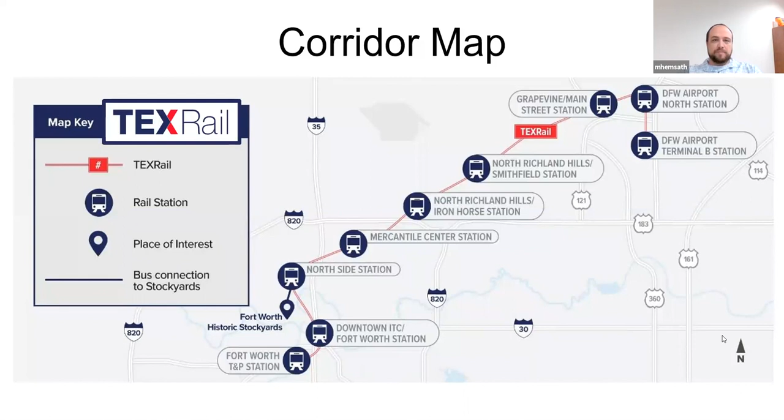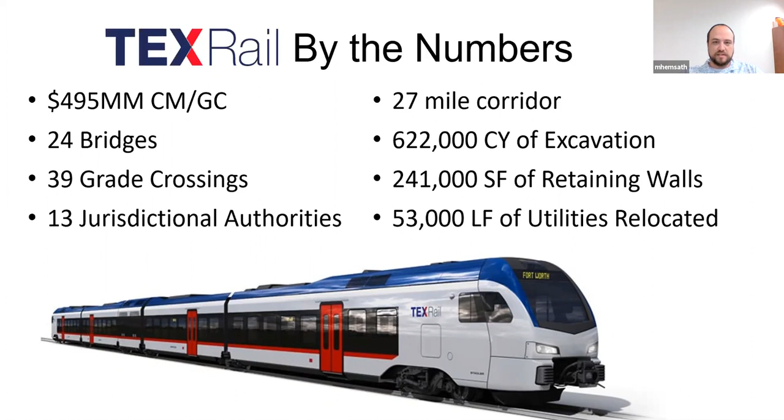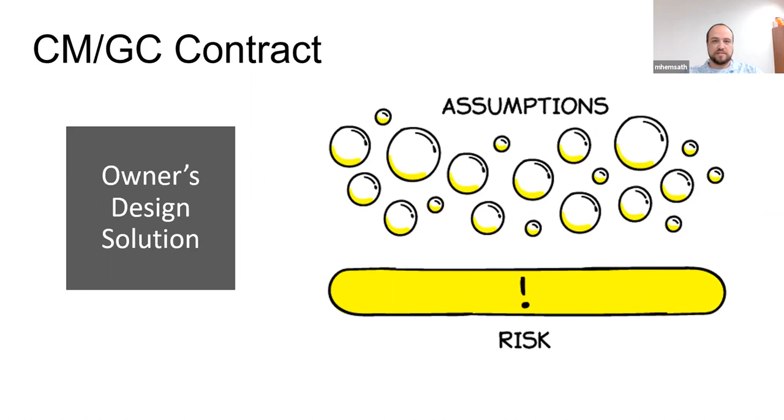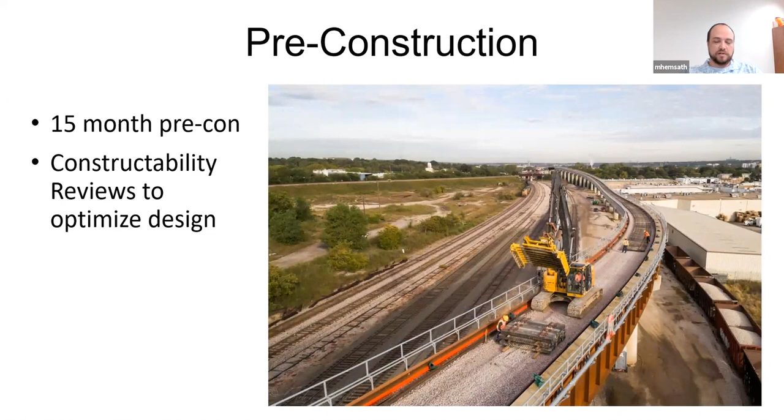So why CMGC? There's a lot of assumptions, especially in this job. As we get into the hole in the wall, you'll see all the assumptions that were made beforehand, and with assumptions come high risk. So bringing Archer Western Herzog onto the project early, TexRail was able to mitigate some of those design and construction risks. During pre-construction, we had a 15-month pre-construction period that helped us review and optimize the design, specifically hole in the wall, as well as a couple of these other bridges.

So as we got into planning the work, you've got to be concerned about what the other agencies and railroads are going to require. For hole in the wall, shoring was a major component as we were going under 4 active freight lines that go through Tower 55, one of the largest and most congested freight crossings in the country. Schedule-wise, this was 24 months from NTP to be able to build the work.

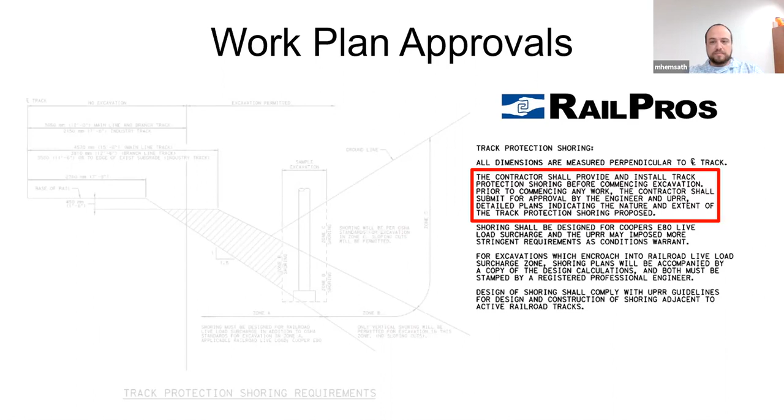So Doug, next slide.

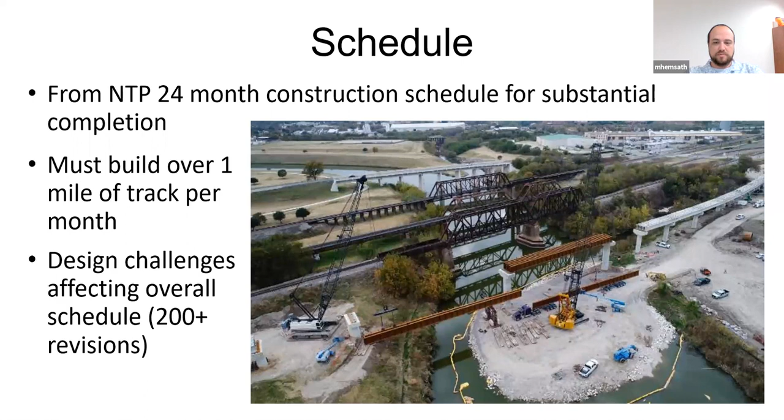So, schedule NTP for substantial completion meant we had to build over a mile of track per month to be completed. This picture shows one of the major river crossings we had to do, also included in that one mile per month, along with all the other design challenges on a CMGC job. We had over 200 contract and drawing revisions to the project, so a very complicated, very complex job that required a lot of coordination from the designer, the owner, and us, the constructor. To make that happen, we had to use multiple forms of accelerated construction.

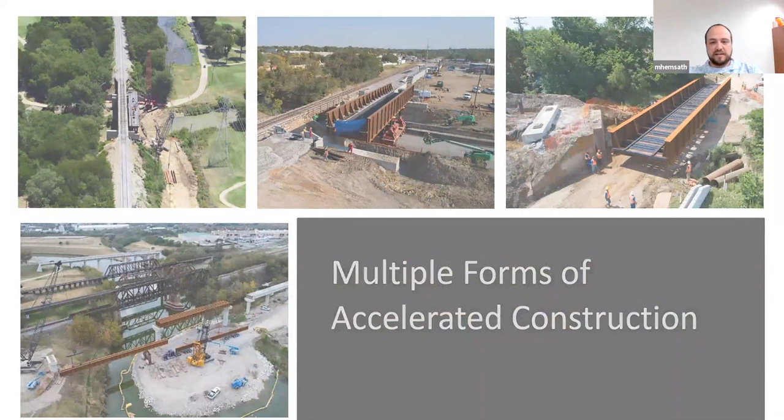Most of these had to do with bridges, but next we'll talk about at-grade track. There were 17 miles of track under existing freight that had to be completed while keeping the freight open. The freight allowed us 3 and 5 day outages every week to get those 17 miles done. In some of the more complex areas we got 400 feet done, and in some of our longer shutdowns we got up to about 2,000 feet, done in a 5-day outage where we removed and replaced the track in its entirety down to the subgrade and back up in 5 days.

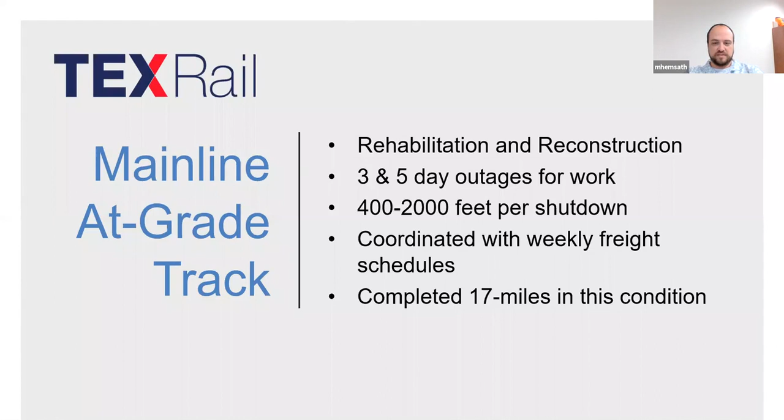Coordination is absolutely key when working with the Fort Worth Western Railroad in these outages. We had a very detailed schedule of what happened every day, overnight, and what scope was supposed to be done. That way we could adjust as needed, bringing crews in early, or if things were getting delayed, bring in additional resources to make sure we hit our closures.

Out of all the outages, there was one instance in the 2 years that we missed our outage. The reason is we got about 3 inches of rain right when we opened up the grade, and dirt and the grade didn't mix with the rain very well. So that one was a little tough, but overall the team did a great job and overcame those challenges.

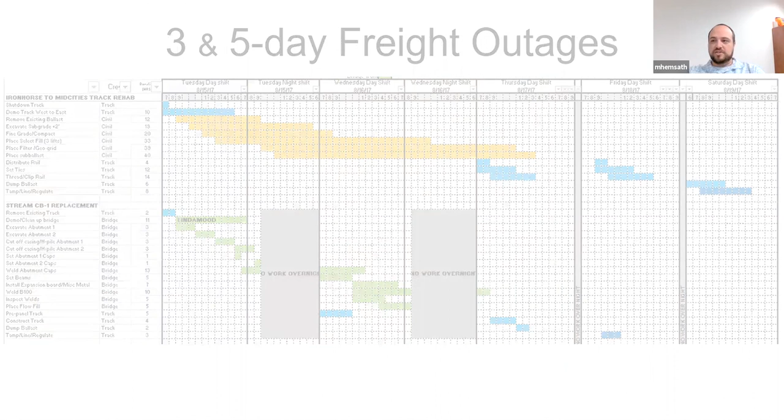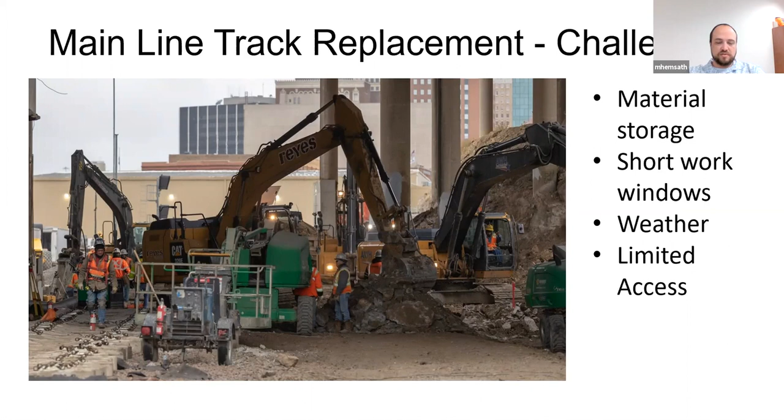The picture coming up next shows a portion of the hole in the wall. This is part of the track demo—very congested, a lot of work going on. Again, this was a three-day outage to get some of this track work done. So being able to get our materials where they needed to go, short work windows, limited access, and weather were all key challenges and key planning aspects to this project to make sure it went off without a hitch.

Next, the Ira E. Woods Bridge. This was a 90-foot through girder bridge. The Ira E. Woods is a historic bridge, and where it was situated on the job, there was no adjacent property to build the new bridge close by. So we actually had to build the new bridge approximately 2 miles away in a laydown yard, then drove the new bridge down Main Street in Grapevine to its new location. The picture here shows the bridge coming to its final resting place after we moved it 2 miles down the main road. This was done in a 5-day outage.

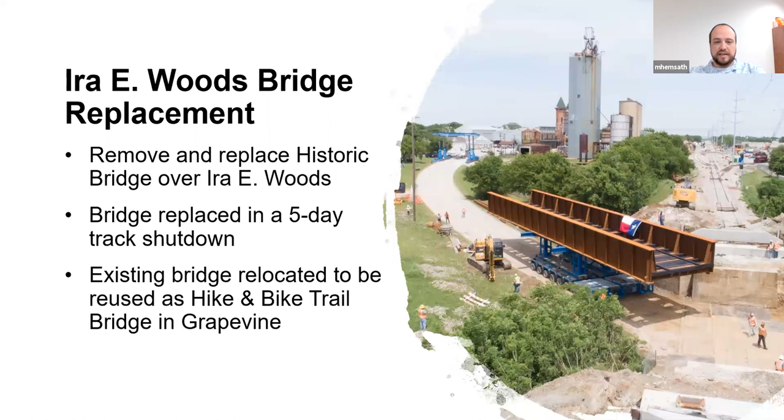To make it even more complicated, the old bridge we had to take and move about a mile down the road, and it's now used as a hike and bike bridge there in Grapevine. So a lot of bridges moving down the highway or down the roadways there—not every day you see bridges just moving through the city.

But to make that happen, when you're moving bridges of this size, underground utilities are a very major concern. So we worked with the city of Grapevine to make sure we didn't impact any of their water lines, because when they're only 4 feet deep and you're moving almost 1 million pounds down the road, that's a lot to be worried about. The existing bridge, like all old bridges, has environmental concerns with lead paint and asbestos, so we had to get that moved and abated. There were also major traffic interruptions, since this was the main roadway in and out of Grapevine, Texas.

Building the new bridge substructure had to be done in advance of tearing out the old bridge. In this picture on the left-hand side, those steel plates are actually covering the new abutment. We had to dig out to get to that new abutment to be able to set the new bridge, with very limited access. What you're seeing in that picture is exactly what our access was, and our entire right-of-way.

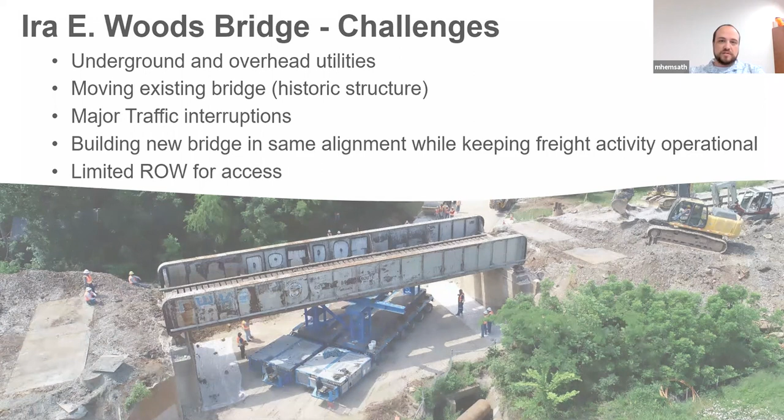This next bridge, Big Fossil Creek, goes over an existing golf course below. To be able to get here, there was absolutely no way to move it up and down the rail.

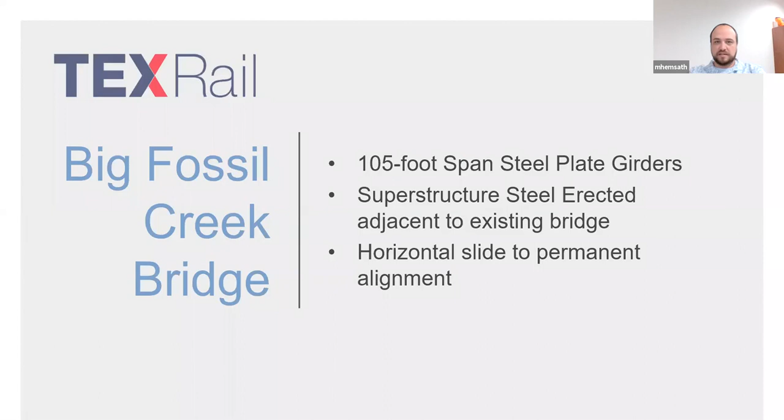So our team elected to do a horizontal slide into the permanent alignment. The bridge was already designed to accept the new bridge in its final location, but to build it, we extended the pier cap over so we could build directly adjacent to the structure we'd be setting it on, then used Hillman rollers and rods to move the bridge horizontally across the cap into the final location.

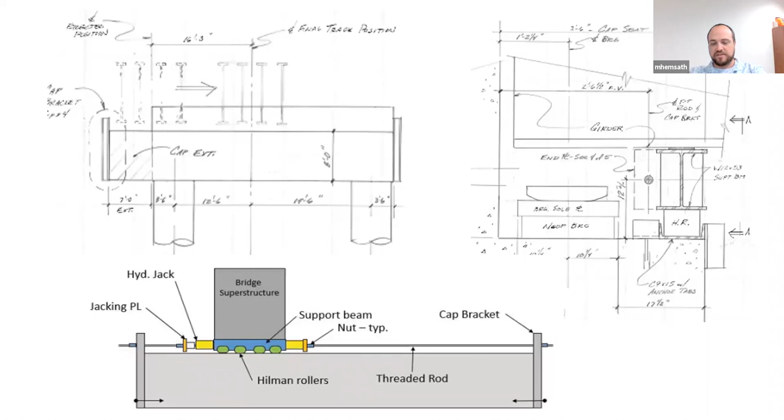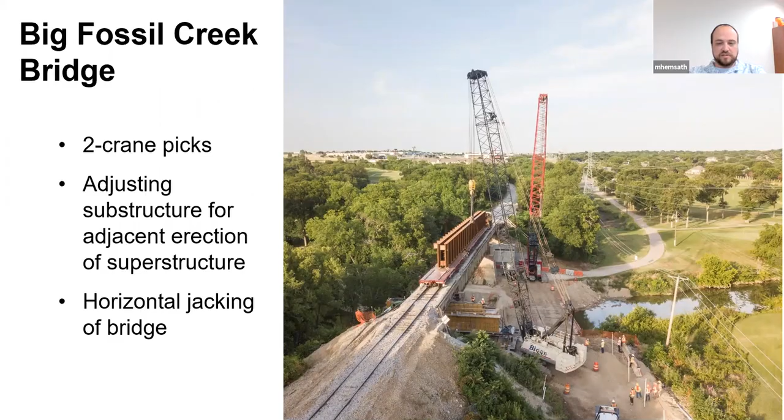Again, this was a 5-day outage. Next picture shows more of the tight access we had to deal with. On the right-hand side there are high transmission power lines, so we couldn't swing around getting into it. The only way to get those beams into place was to bring them by crane or by rail to the cranes, and then the cranes set them down onto the new cap. From there, we moved it over to the new location using Hilman rollers.

The challenge here was a public golf course, and being in Texas, they don't shut down very often - maybe a little more than they do in Phoenix, but still rarely. This was a 5-day rail outage, and what made it even more challenging is that the two outside spans, which were box beam sections, also had to be replaced in 5 days. Getting the old bridge torn down and a new bridge erected in 5 days was very difficult. Our original schedule was 9 weeks, and the team did very well.

It did rain on us a little bit here, but we ended up getting done in 4 days, so even 1 day in advance of our 5-day outage.

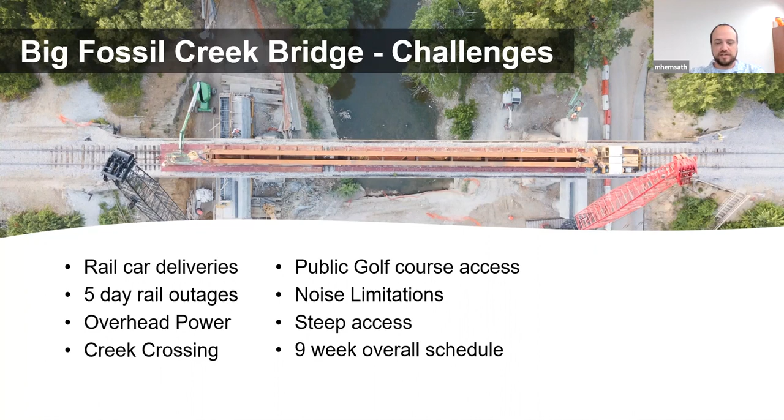Next bridge was 28th Street. Again, this is a bridge that required freight to be able to go over it a few days after we were done. So being able to build this one off to the side - this was also a 130-foot through girder span - we used SPMTs on this one as well.

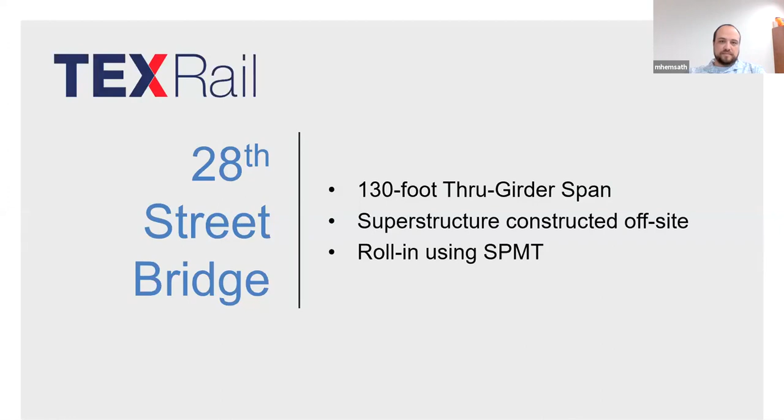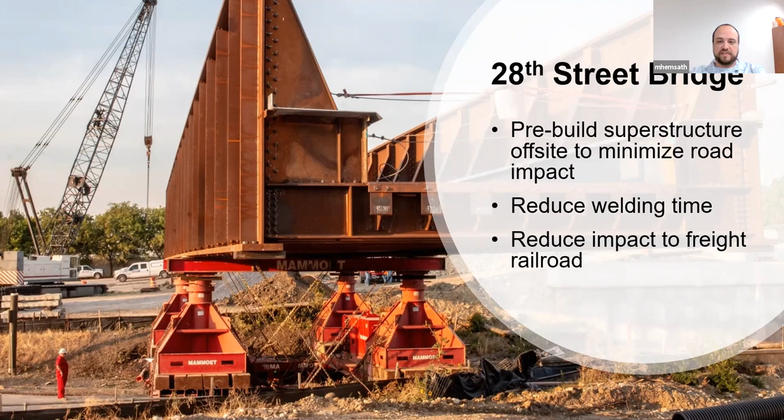This one was a much larger bridge than the Irie Woods bridge, but being able to get it off to the side, we were able to get all the welding done. 28th Street is a TxDOT owned roadway, and they would not allow us to close that road for any length of time. So to get this entire bridge welded the way it needed to be, we had to build it off to the side and then do our touch-up welds and final welds once it finally got in place.

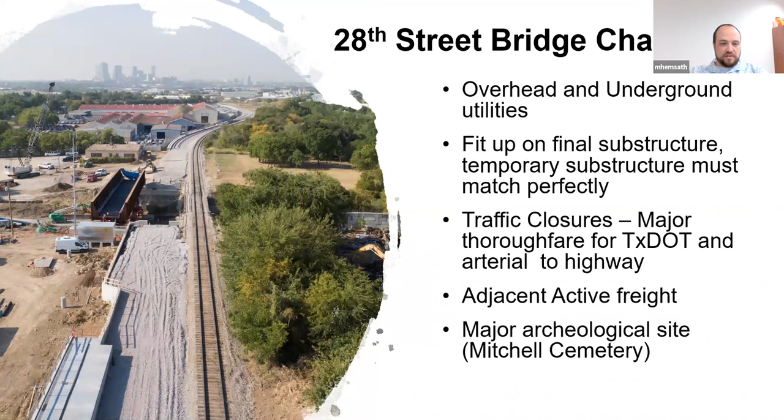This is also to reduce the impact to the Fort Worth Western and the Union Pacific. This is that area there - we built the bridge just off to the left-hand side by that white crane, came down onto the roadway, and moved that bridge into place. Again, this was a 5-day outage.

The other thing we had to worry about in this area, on the right-hand side of the picture, is an archaeological site - a cemetery, Mitchell Cemetery, that dates all the way back to pre-Civil War. So it was a very sensitive area in terms of archaeological sites. We had TxDOT and freight railroads involved, so a very congested area with a lot of jurisdictional authorities.

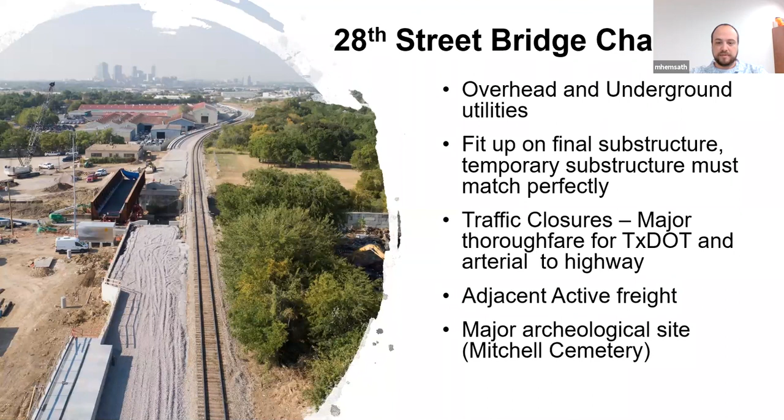With the overhead and underground utilities, moving that bridge, we actually had to raise up a couple of the overhead utilities to make the bridge fit in its final alignment. And with that, that's all the boring-moving stuff. Doug will take it over from here and go through the hole in the wall, which I believe is what everybody got on this call to actually learn about.

So I think you heard Pam say at the beginning, I'm kind of a passionate guy for bridges. I'm a bridge nerd, if you will. And this job was a bit of a dream for me to be able to be involved with, because this is a really unique thing that we did on this project.

The project was full of bridges, and what we're hoping you would take away from this presentation today is on these railroad projects. A lot of people in the audience deal with DOT projects, maybe more than rail, but a lot of times you have freight rail interaction on your project, and we were hoping you could see ways you could take a second look at the planning in advance of those projects, see how to get them done a little bit faster, a little bit safer. Safety and high quality is what it's all about when you're dealing in any construction setting. That's what we ultimately were after on this job.

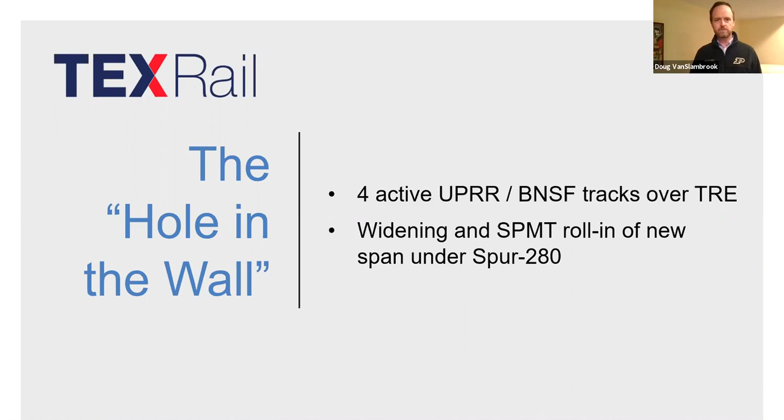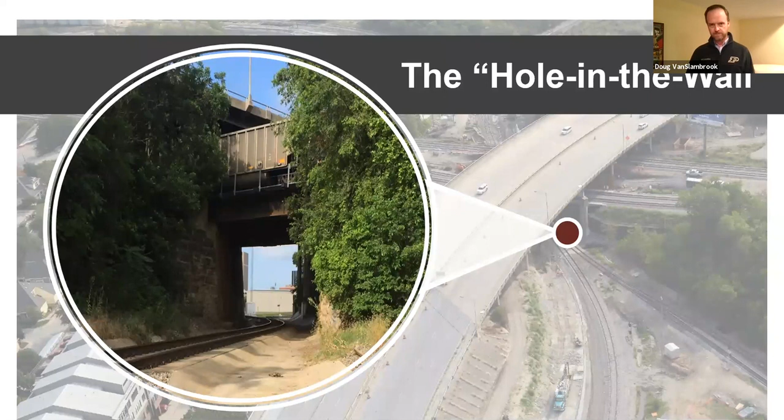So the hole in the wall, it was kind of a colloquialism, if you will, but that's what it's all about, is that picture right in the middle of the screen. You can see the little window that the Trinity Railway Express shoots through, as well as Amtrak and Union Pacific Railroad. There's a lot of crisscrossing of other infrastructure over the top of it. Essentially what we had to do in this portion of the project was get rid of the old span there in the middle of the sandwich and replace it with a brand new one. And we had to do that all under short outages and not disrupting freight service, passenger service, or TxDOT traffic. You can see in the background picture there's a major thoroughfare going into downtown Fort Worth, going over the top of this interchange.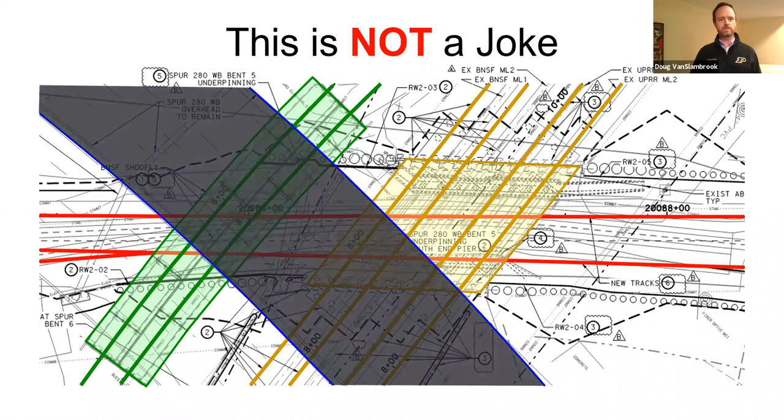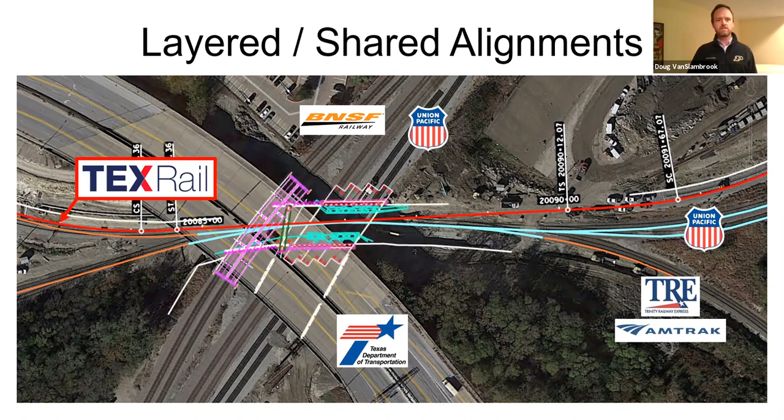So here are kind of all the players, I'll highlight them on the screen here as we go. You have Trinity Railway Express, Union Pacific, Amtrak, BNSF Railway. So you can see it's a very crowded party, and we're all trying to function together. And then you've got TxDOT over the top of everybody. So there's the KMZ line work of essentially what we were building underneath everything.

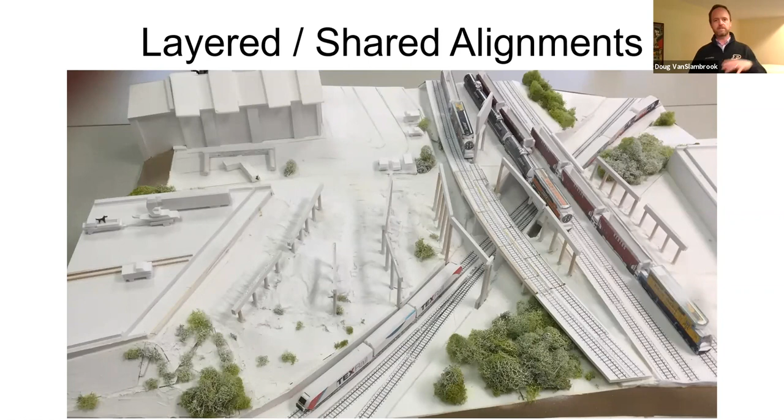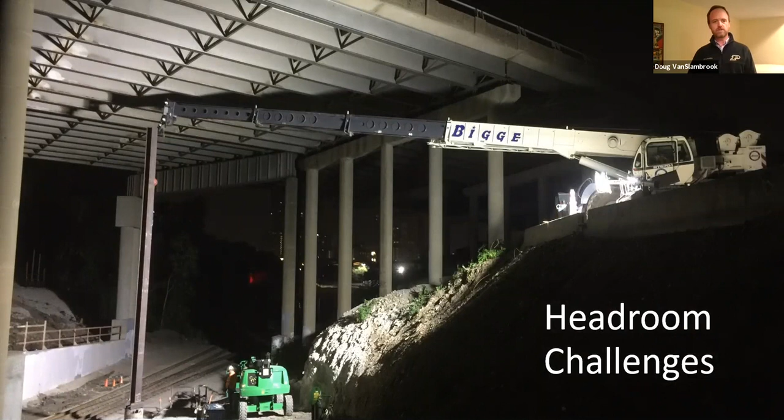This is the Trinity Railway Express track, which would become the double track TexRail commuter track, sitting up on top at the same grade. The crane you see in the picture is at the same grade that all the freight railroads were, passing underneath the TxDOT overhead. So you can see it's just stack upon stack upon stack of things to work within. That's the type of headroom challenge we dealt with all the time, drilling shafts, installing formwork, and placing concrete pumps.

So Matt talked about constructability reviews and CMGC. After the constructability reviews, we went through this with the owner's design. The owner's design had a really complicated detail of underpinning an existing TxDOT support and offsetting some columns, and it was going to be kind of a big mess to build.

So we brought in a third-party construction engineer and a lifting consultant, a heavy moving consultant. We had Mammoet on this project. We had another company called Burkhalter, which is now branching off and doing a different company - they're not Burkhalter anymore. But in any case, we used heavy lifting equipment, SPMTs, push-up systems, and I'll show you all the details on these things.

Essentially we had to replace a bent cap on the existing TxDOT overpass in a very short one-time railroad outage. Then we had to pre-assemble our steel bridges off to the side - the new freight rail bridges for UP and BN - and bring those in under 2 separate short outages. It was phased construction, so you could keep all the freight moving while building all of this.

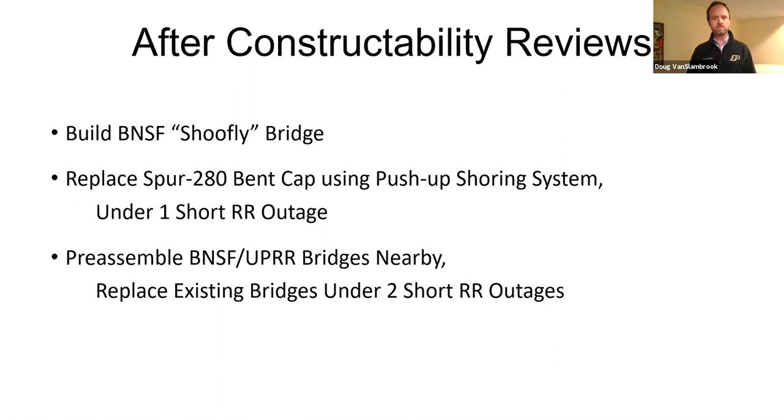So very tightly packed spaces. A lot of times we're building in between UP on one side of us and BN on the other side of us. So it's very busy and a lot of planning as a result.

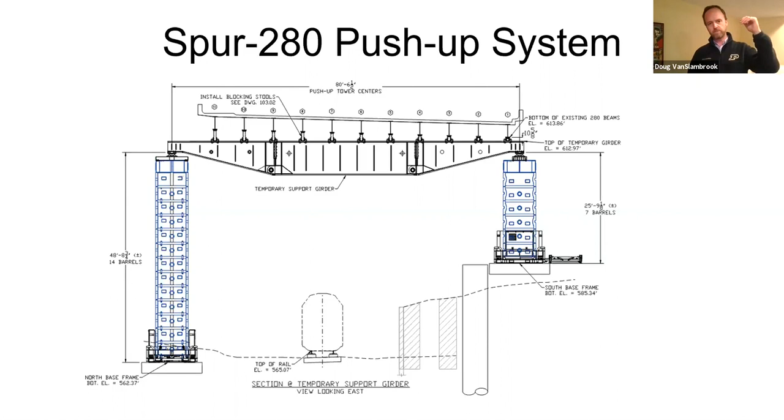So you'll see some views of the existing pier. What we were doing was lifting the 280 overpass off of its existing bearings so we could get the old pier out, put a new bent cap in place on a straddle, and then drop the deck back down on top.

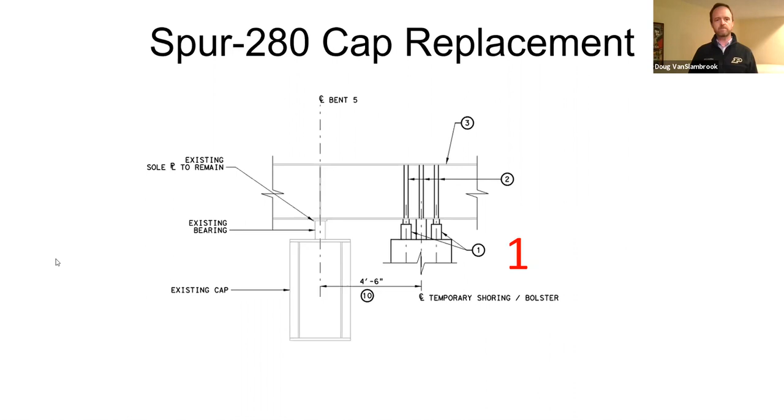So just the step-by-step of how this worked. Schematically here, you see the existing pier cap going across a narrower straddle bent. This is a schematic of that blue thing you saw in the previous view, which is our temporary cap that had a jacking system on it to lift the existing bridge off.

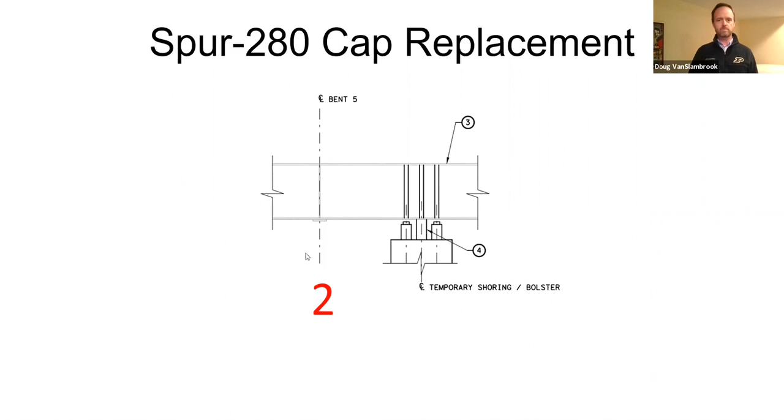Once it was lifted off, you could demolish the old structure while keeping it supported on the temporary bolster. Step 3 was to fish this new, larger section, longer straddle cap underneath the existing TxDOT bridge. Then you transfer the load over to the new bearing and take all your temporary shoring down.

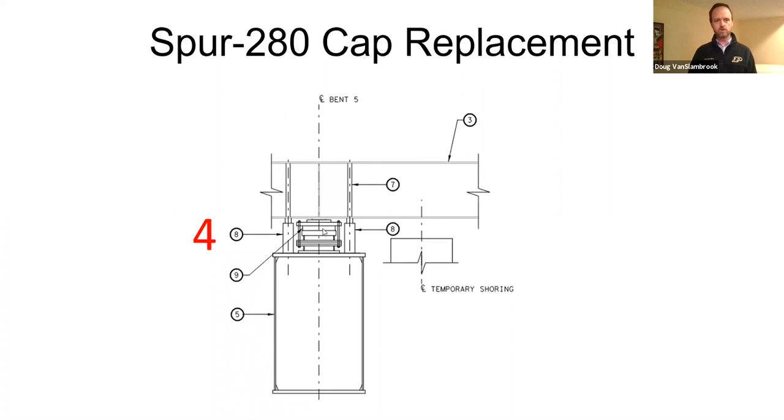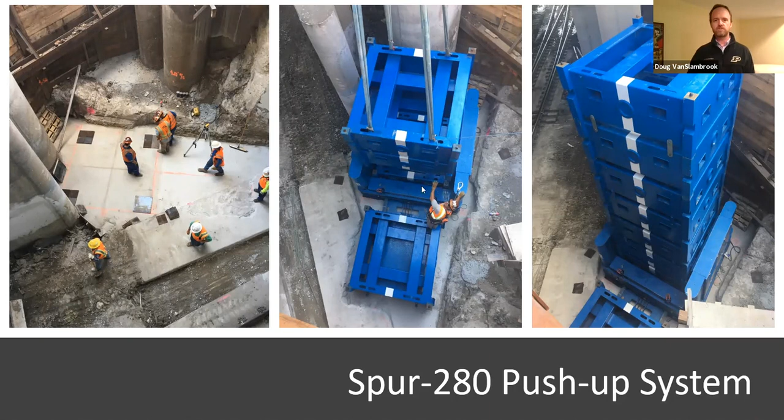So you see the stacks going on. Basically you stack this shoring system up until you get it close enough to the bottom of the existing deck, and you put this jacking cap on. This jacking cap is designed for multiple uses - you can see there are pin connections here, so they could swap out this center section to make it narrower or longer, whatever they needed.

So once you get it to the bottom of the deck, you put these bolsters on, and then you incrementally jack the 280 deck off slowly to get them off the existing bearings.

This is a big spot where our third-party construction engineer came in. We hired McElhaney, if anybody's familiar with them. What McElhaney was able to do was model the stiffness of the existing composite deck and figure out, when the deflection started coming out of this blue jacking beam, they fine-tuned the shim detailing on top of our jacking stools, so we wouldn't have to go over here filling shims an inch and then chasing it from location to location. It worked out really well. McElhaney did a great job, and we spent a minimal amount of time up here on top of the tower putting shims in place, which was kind of the goal of the whole thing.

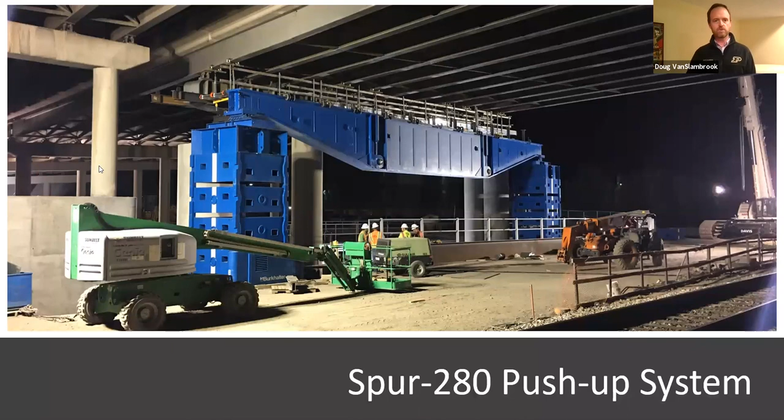We had some custom rigging devices fabricated, load tested, designed, signed and sealed. And then we had a couple of cranes sitting off on the outside of this to lift this off of its existing columns. This is after the temporary shoring system had taken the load of the deck above and daylighted it off of the bearings.

So you remove the cap, and then we did a wire saw cut of these existing columns to get them out of the way, just enough to be able to put the new bent cap on top.

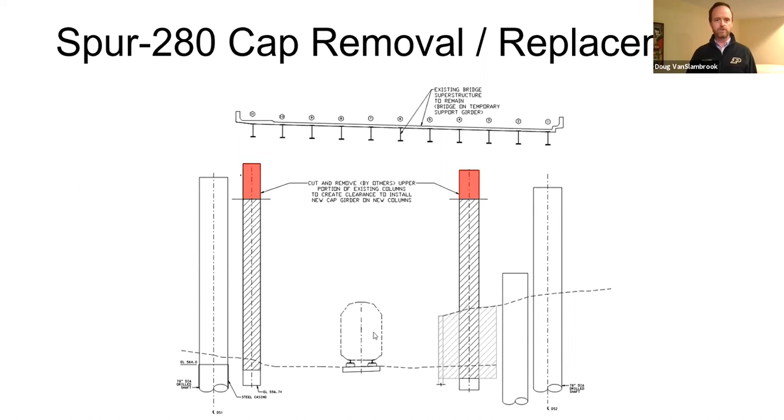So what you see here in the dark line work on the outsides is the new straddle cap columns to allow a bigger span underneath. You can see the shaded area coming down is narrower than the new one. You've got a single train down below, and when we're all done, we're going to have two.

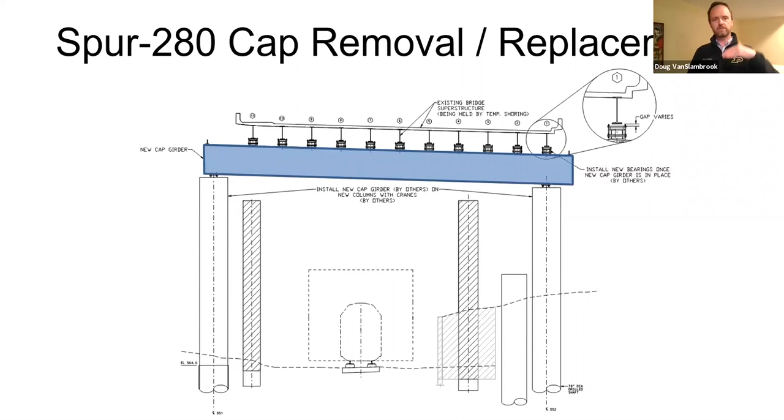So the blue shaded box is our new cap girder that was stuffed underneath. I've got a little bit more to show you on how that was done. But if you can imagine, this blue cap was placed on top of the new straddle columns, and then the load was taken out of the shoring system and down onto the permanent bearings.

Really tight working quarters again. This time, headroom got the best of us. We had to come up with a way to go up and over the top. So we had a 600-ton crane out here, a big hydro, reaching up and over the highway.

This was a nighttime outage of the highway, dropping the block through a 4-foot gap, essentially, to be able to maneuver one side of this new pier cap.

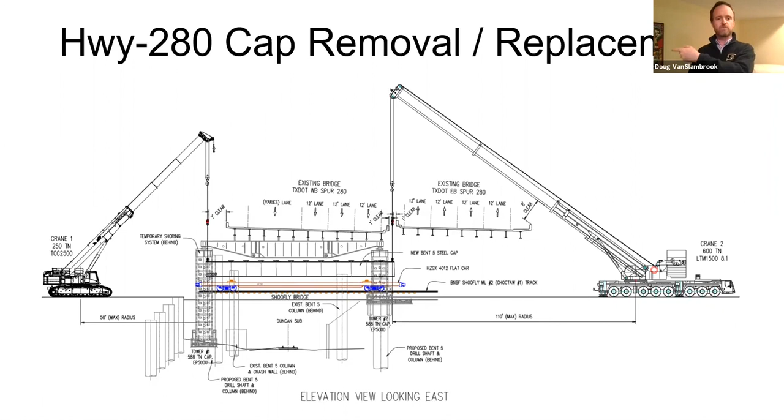You can see a rail car here in the foreground. So we utilized our shoofly bridge, our temporary BNSF bridge, and worked with the railroad to keep them off of the one track we needed, and brought the new cap in on a rail car. First, we took the old cap off, landed it on a rail car, took it down the way where the new one was sitting, flipped them out, brought the new one in, and lifted it up and on.

So it was a really efficient operation and highly coordinated with railroads to get everybody rowing in the same direction, as we like to say.

So here's our wire saw operation, cutting out the existing columns. And then, probably my favorite thing of this whole job - I've been around the block a little bit and seen a lot of tools and tricks of the trade.

But this is a counterweight offset picking device. In the steel erection world, we call these a pump handle, because if you can imagine yourself pushing down on that back end, it's like you're operating a pump handle.

So this counterweight would trolley back and forth through a remote control held by an individual on the ground. And as your crane comes up on the piece of column that you cut out, you keep moving this trolley back and forth until you get it perfectly balanced, and then it picks it right off and you can swing it out.

So you can reach up and under something. It was a perfect application for all the headroom issues that we had.

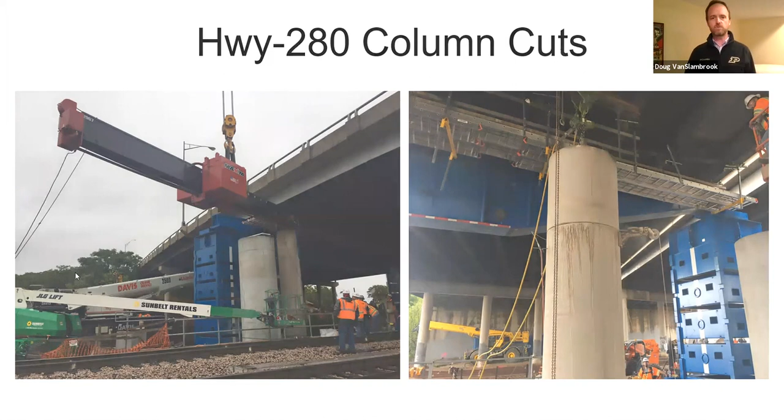And then the success of this operation - we had a 5-week outage that was talked about in the owner's original concept, where we said, if you let us do it our way, we can make this design a lot cleaner and bring it in an operation that's much more efficient. So we ended up, after negotiations of our redesign, at a 43-hour allowable outage, and we finished it more than 20 hours early.

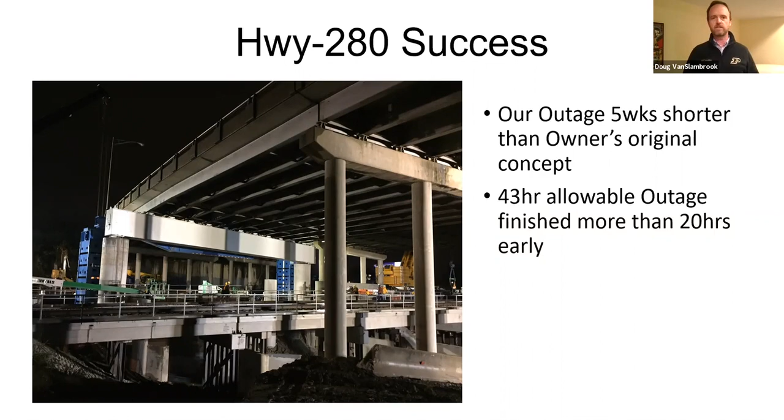We felt pretty good about ourselves. And then we got a dose of reality, because this next one was pretty tough, but it went off really well too. I'll share some of the challenges of this.

So after the pier cap - actually it's order-wise, we did the bridge first, the pier cap second, and then the second phase of the bridge. But this is a better order to show it in, so you're just going to have to roll with it.

So for the steel spans, we rolled them in, as you saw on that previous slide. You can see in this photo, we have the new bridge on an SPMT coming in on a temporary runway, which is bridging the hole in the wall, as we call it. There's a temporary gantry system underneath that jacks up and lifts the bridge off of its temporary platform. And then we pull this runway out and drop it down into the hole.

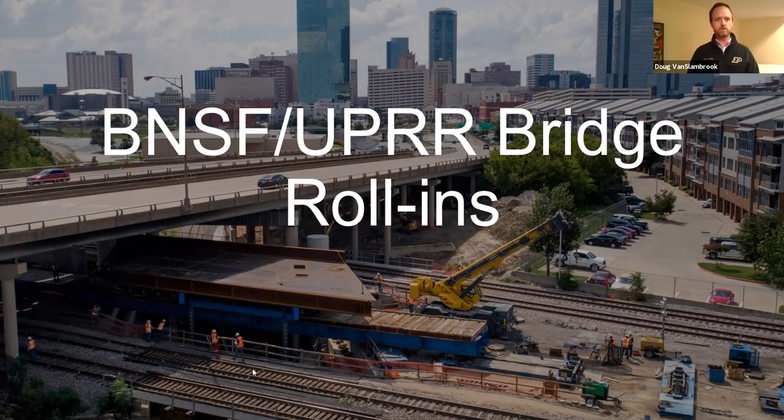So the roll-ins are kind of similar to what Matt talked about earlier in the presentation, with the close coordination between us and railroads and other stakeholders. We had this on an hour-by-hour schedule, all the way from the beginning to the end of the outage. We had checkpoints.

These green things are basically quality hold points, because there's certain points of no return, if you will. Anytime you do a complicated operation like this, it's paramount to say, okay, we can't screw this up, and we can't screw this up, and we can't screw this up. And those are the hold points, right?

So we identified all the hold points in this case and walked the railroad through an hour-by-hour meeting. We said, okay, hour 1 we're going to do this, hour 2 we're going to do this. And then there were check-ins throughout the night on a text message string, basically to say, you know, we should be at hour 11 and we're at hour 12. So we're trending an hour ahead.

Actually, at one point we were trending like 18 hours ahead, but we told everybody we were on time, so we didn't get everybody too excited and then have a hiccup happen and it all blow up in our face. So here's how we were able to get this accomplished.

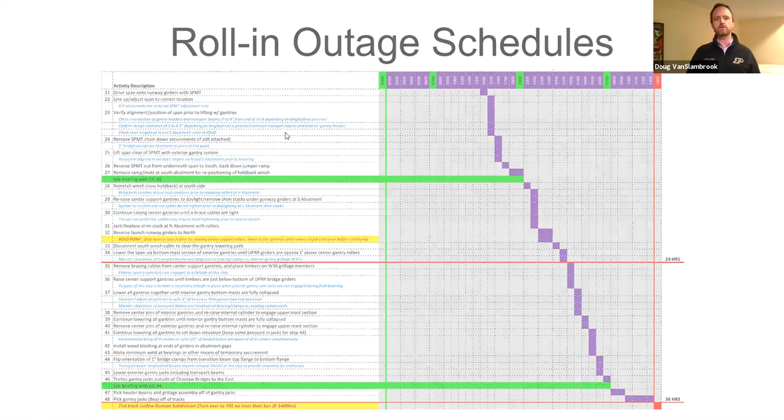So I mentioned we had a temporary runway. If you can imagine, you're looking through the hole in the wall, basically, where you see this gantry system. We had a gap here between new abutments that was much larger than the gap between the old. You had TxDOT running over the top of us, of course, and you had active freight on either side of us running back and forth constantly.

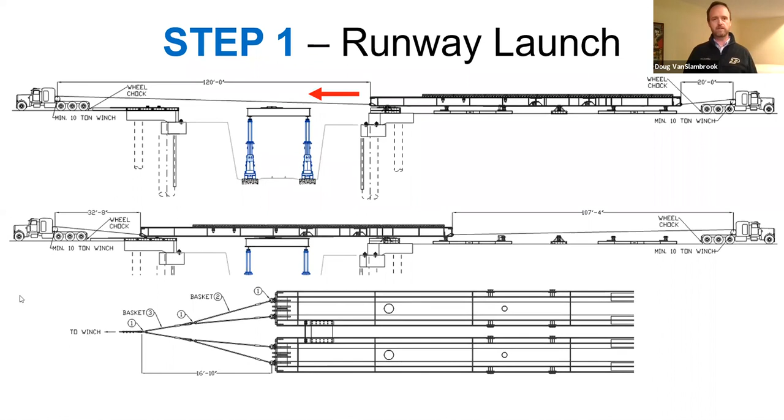So step one of this operation was to launch this temporary runway across the gap. We used basically a winch system - this is just a big heavy-duty tow truck - and pulled this runway in. You can see it supported on temporary supports on the right-hand side of the screen there, on rollers, and basically it just rolled across the hole until we landed it on the opposite abutment, creating a temporary bridge for the new span to ride up on.

A challenge of this is how this gantry system was detailed. You can kind of see from the center of the screen here, we had an interior gantry system that was used to support this runway temporarily as it came across the hole. Negative moment got a little too high when the thing deflected down over a certain distance off of this last support at the abutment, so we had to temporarily support it with another roller in the middle. So that's the highlighted gantries you see there.

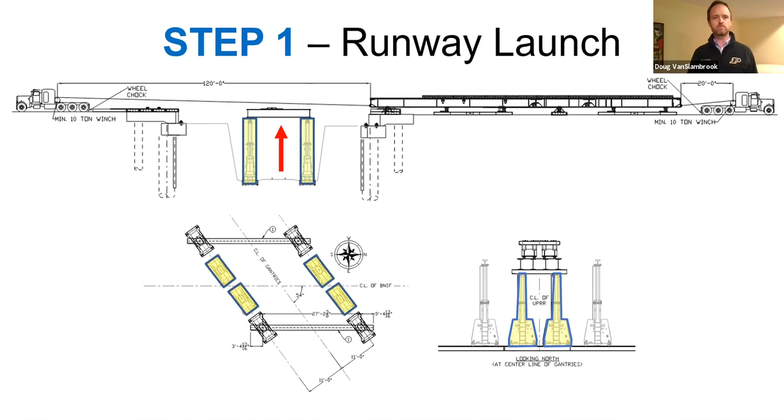And then once the system went over that temporary support, we'd jack it a little bit higher to allow a little bit more deflection until it landed on the other side.

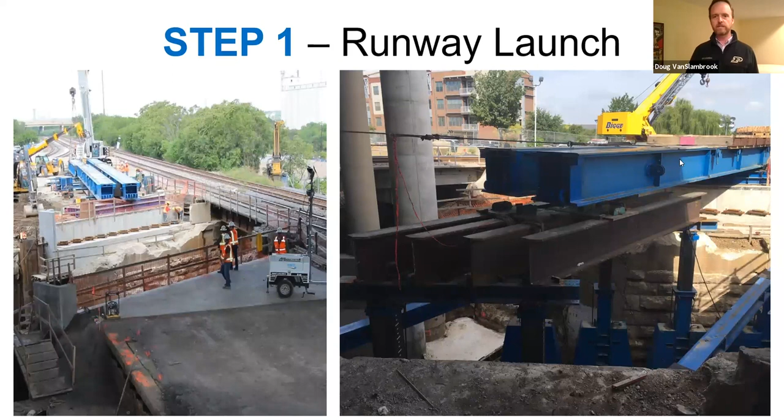Some pictures of that. Here's the hole in the wall. Basically, we're bridging the gap of the hole in the wall with the temporary runway. This is the temporary runway being launched across the hole, and the gantry grillage there with the rollers on top to accept it, to keep it from getting too deflected for its own good.

And then our pre-assembled span was about an 800 kip load. We put that on a self-propelled modular transporter, SPMT, as we refer to it in the industry.

And then we rolled that up a temporary ramp over the hole, basically into its final horizontal position over the supports. The exterior gantries, shaded in yellow, of the 8 gantry system would lift up on lifting beams, kind of tough to see, but just above the SPMT wheels. There are 2 beams there that this gantry system would push up on. So now you can see the span levitating above the SPMT.

It's not really doing that because the gantry's holding it, I just didn't draw it that way, sorry. And then the SPMT backs its way out, and then we reverse launch the temporary runway out the other way. Basically what it does is it leaves an empty hole for us to drop the bridge down into.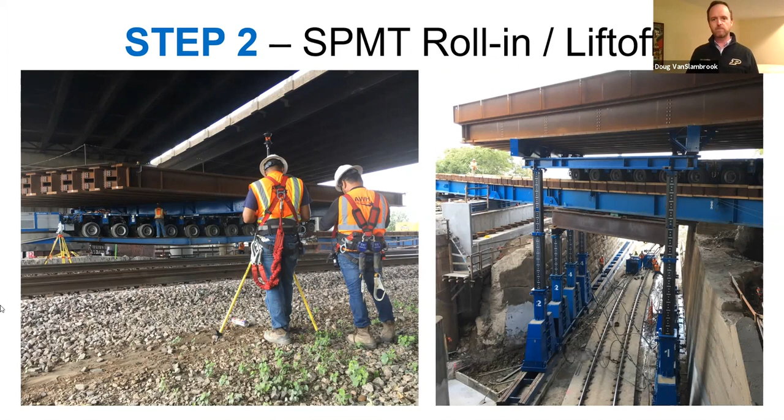And then on the right-hand side, that's the gantry system fully supporting the span completely off of the SPMTs. You can't really see it in the picture, but the SPMT is starting to back out. It's backed out about halfway at that point from where we had it when we brought the span in.

So some of the challenges we dealt with here: we had to be careful not to max out the height of the gantry system. It had a 20-foot total stroke, and I think we were something like 8 inches from having it fully extended to as high as it would go.

So the detailing of the temporary support members had to be just right. If we ended up making things a little too tall and having to push it too high to get clearance above the SPMT, we'd run out of gantry stroke. So that's just some of the things when you do a detailed operation - you think step by step, it's got to be perfect.

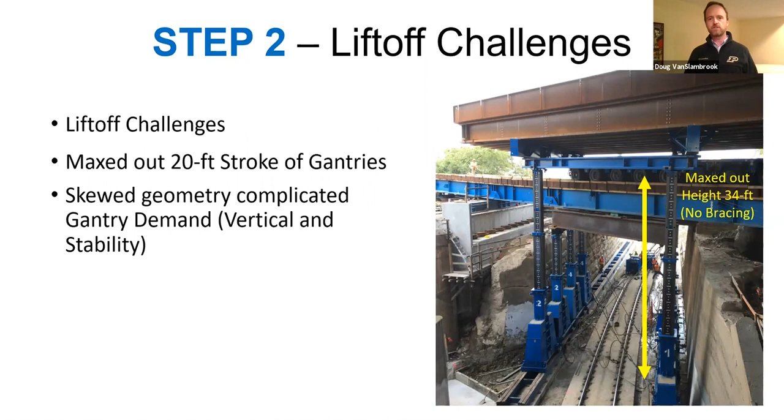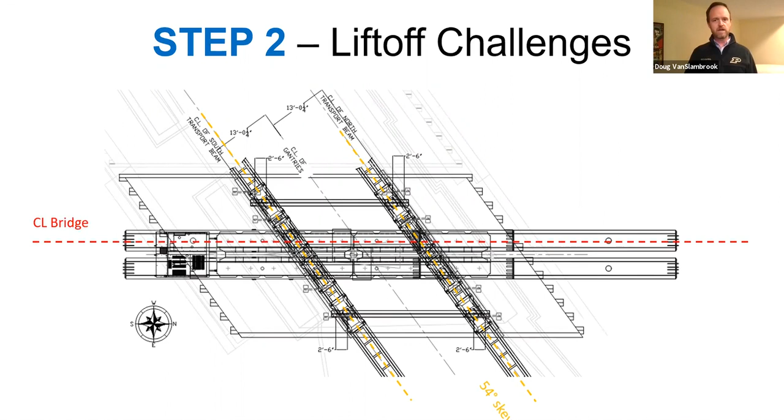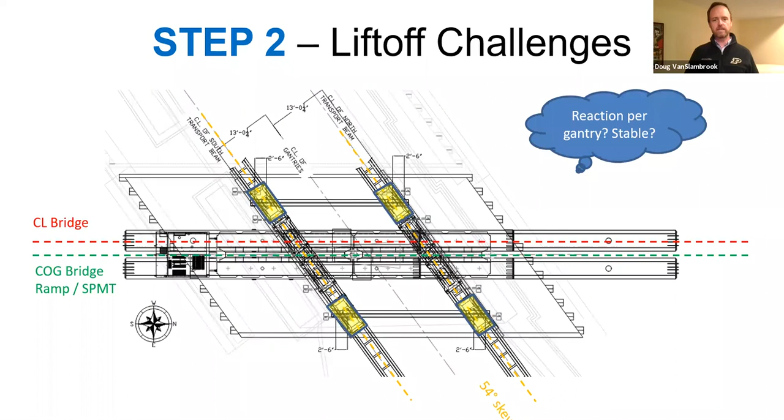The skewed geometry of the bridge made it really difficult to design the gantry system for stability. If you look at the screen here, you start to see some of the geometry challenges. We have a center line of bridge that was different than the center of gravity of the SPMT system and the ramp. That had to be accounted for in the stability of the gantries - are the reactions going to result in something stable?

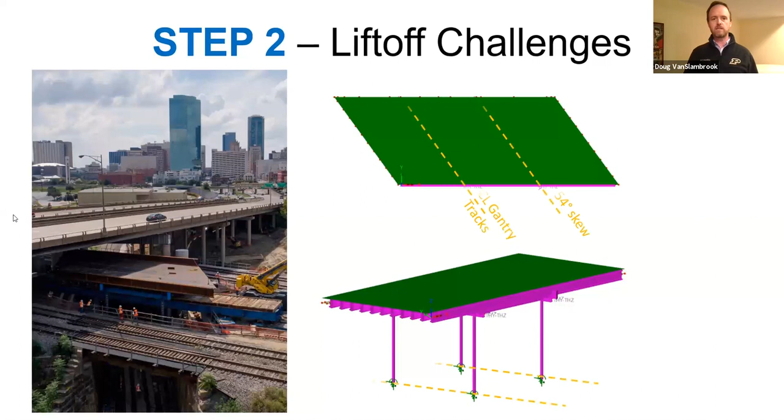It was also a big concern that the thing wouldn't be able to lower at exactly the same rate. But all 4 gantries were operated separately, so we were able to control that as we came down, and keep an equal load in each of the 4. That was really key to the operation - having a really good gantry operator.

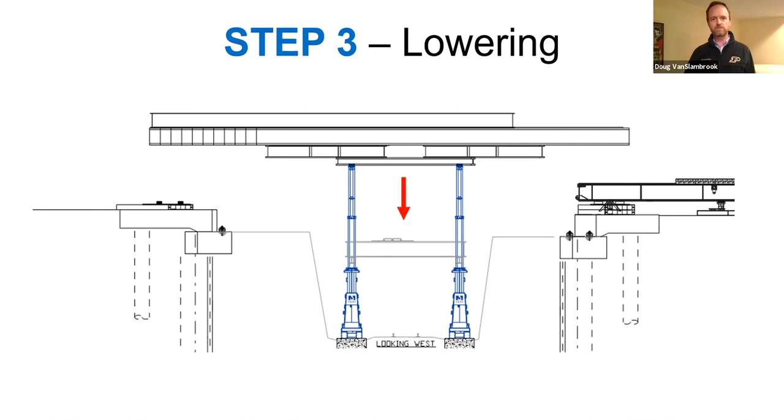And then step 3, lowering. Pretty simple on the surface - mainly what we were dealing with here was clearances. So I've highlighted our lifting grillage, and you can kind of see the existing abutment on the right-hand side. The old hole is much narrower than the new, but that had to stay in place to support the existing bridge that was still in the background, carrying UP trains back and forth while we were doing this work.

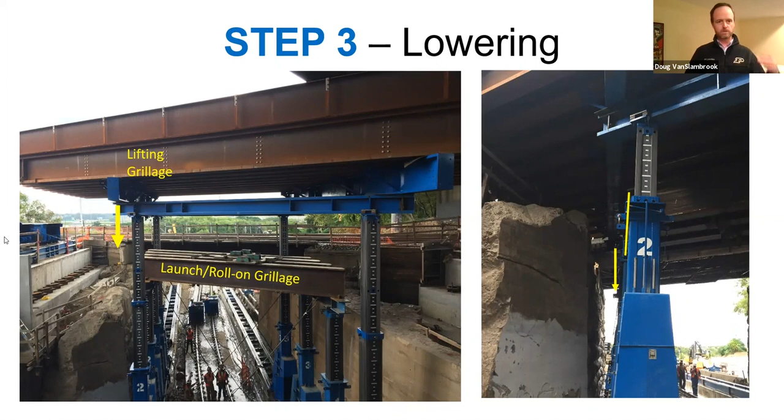So we had to check lots of clearances with very tight tolerances. You can see some of the things we had to be careful of. We were going to clear our launch roll-on grillage with our lifting grillage as we came down, because it would basically swallow it.

The existing back wall - we were out there on some night shifts doing extra chipping just to make sure we had enough room. And this is really what it was all about. At the end of the day, when we set this thing down to get the railroad to accept the bridge, we had to be within AREMA geometric tolerances of a half inch horizontal, one inch plus or minus longitudinal.

You can imagine how tough that is to drive something that big in and get it that accurate. But the way we were able to do this was with some laser survey equipment, basically a plumb laser shooting down on a control point. This is where we were before we made our fine-tune adjustment.

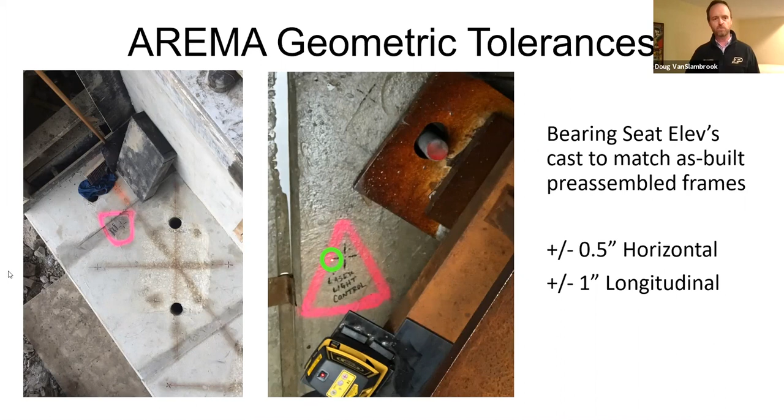So we were pretty proud of how close we were able to become. This is how close we were able to get before actually making the final adjustments. And then we made the final adjustments with just chain come-alongs, wrenching the bridge one way or the other, using the flexibility of the gantry legs to allow us to do that. Since the gantry legs could handle the bridge unbraced, it made it possible.

So at the end of the day, the project was very challenging, very exciting. We were all proud to be part of it, proud to deliver the project for the city of Fort Worth. I'll turn it back over to Matt. Appreciate everybody listening to me - I love talking about this job, in case you couldn't tell. So I'll give it back to Matt to bring you home.

Yeah, so like Doug said, this was a very challenging job. There were a lot of people, especially at that hole-in-the-wall area, that were key to making this happen. Union Pacific was highly involved, BNSF was highly involved, Rail Pros were the BNSF and UP reviewers, TxDOT was involved, the city was involved - just an all-around heavily coordinated effort.